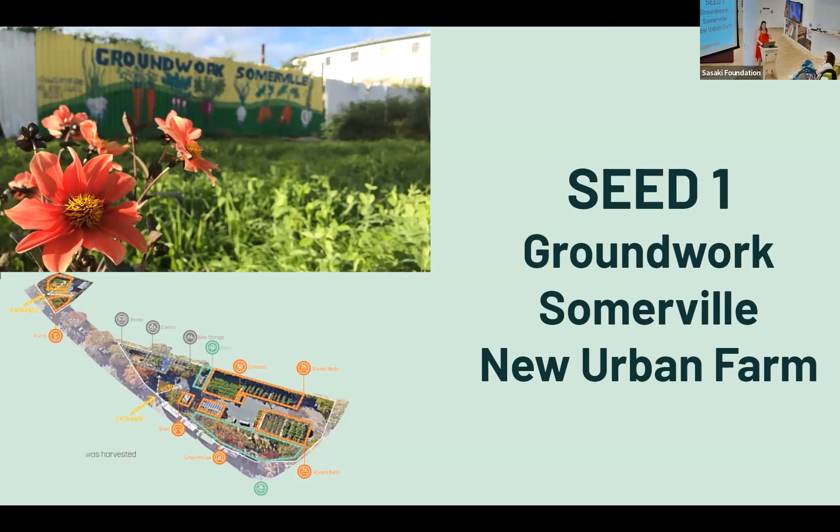So what did these incredible high school students work on this summer? They were able to work on 2 different projects. One is the Groundwork Somerville New Urban Farm. Groundwork Somerville is a nonprofit that works with young people in Somerville to do urban agriculture work, food security work, and a whole bunch of other really important things. And the 6 teams today, you will see presentations about their potential redesigns for their farm as they're going to be moving in the next handful of years.

Our SEED 2 students got to work on the 10 World Trade Youth Design Competition. So much fun. They presented on Wednesday. We're just so ecstatic about all of the work that they did. Congratulations, you were fantastic. And you're going to get to see their phenomenal presentations in just a minute.

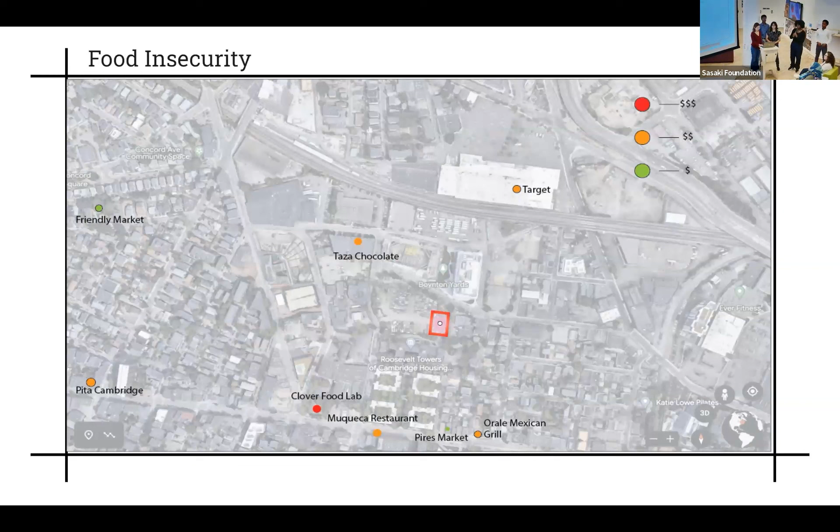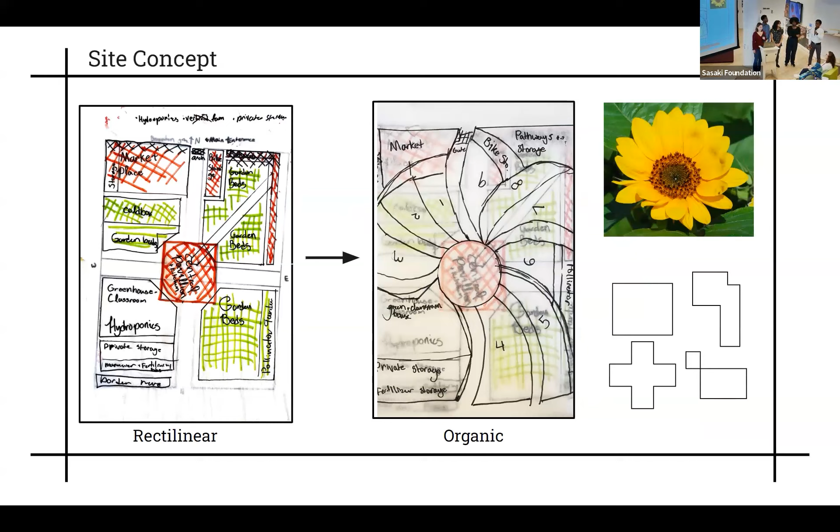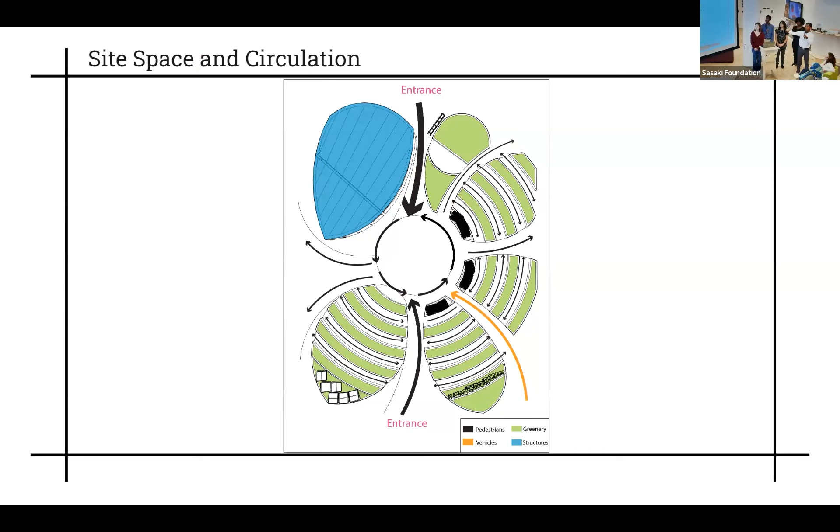This is a diagram of pedestrian and vehicle circulation on the site. At the top, we made the paths wider at the entrances and also in the center pavilion and the outdoor kitchen over there. And then over here is a photo that shows where all of our components are going to be laid out. As soon as you enter, you're going to be going through a trellis, which will be like a welcome and inviting space for you to walk through. This will lead to a central community space where you have on the left your greenhouse and then also the kitchen. And then all around the whole entire site are garden beds to grow produce and crops.

The trellis allows for an inviting entrance to the site. It also gives a visual experience to the community. It also gives access to the garden beds.

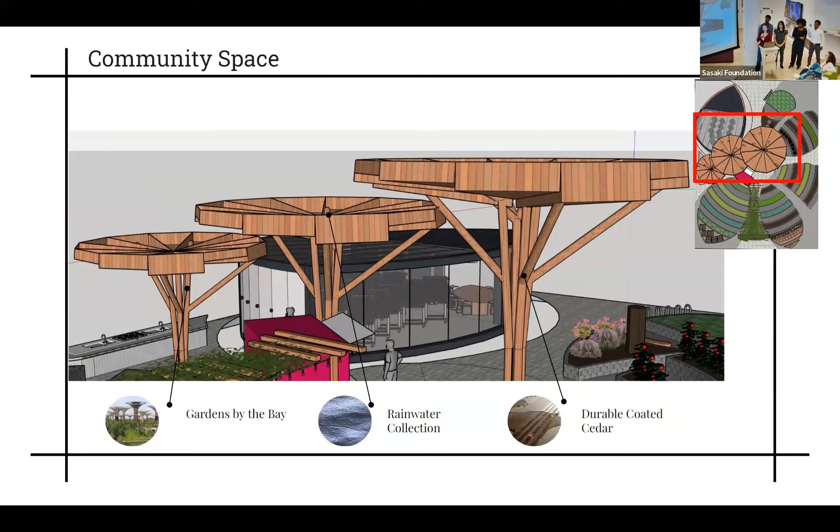So this is the community space that the trellis leads to, and these are the canopies, and they're inspired by Gardens by the Bay in Singapore, and they also resemble trees a lot. So these canopies are perfect for shade during sunny days and also shelter during rainy days, and they're ideal for rainwater collection. And the material we chose is durable coated cedar.

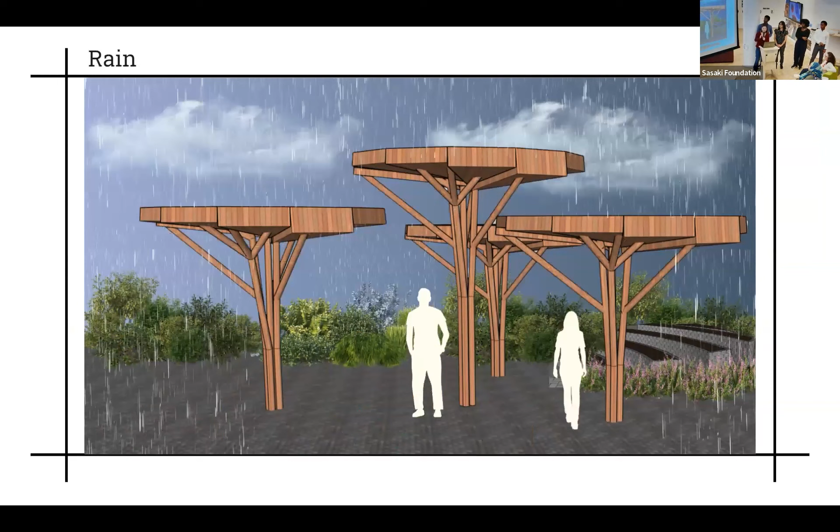And this is a 3D rendered version of our flex space, and it houses our mobile market, which can be removed depending on the context in which the space is used. And so given this flexibility, during the daytime, this can be used for the marketplace. During the evening, this can also be used for events because the canopies can hold lights to illuminate the space. And then also during rainy days, this obviously provides shelter.

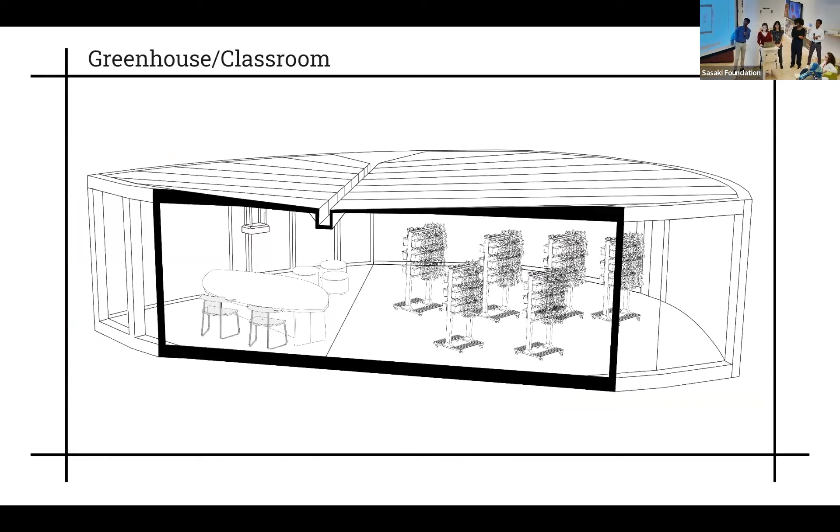And then over here is another detailed section view. It's important to note that on the roof of the classroom section, there are actually solar panels, and these will be used to power our solar-powered projector. And then over here, on our greenhouse, we made our roofs angled so that the water will go to a central point. This central point will lead to a pipe, and this will lead to the water collection system.

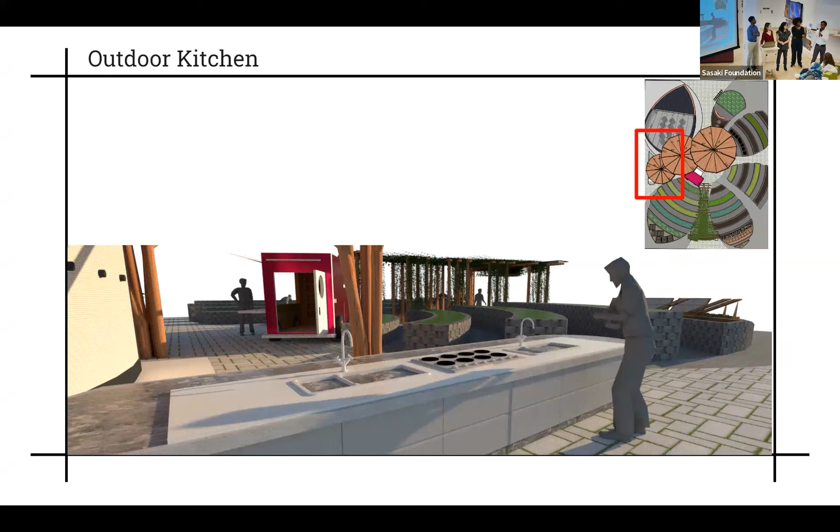The outdoor kitchen is strategically placed so it would be close and give direct access to the greenhouse, the center pavilion, and also the garden beds. For example, the kitchen allows for the community to be taught how to cook the food that's grown at the site. We also created a mobile kitchen that will be used to generally serve the community, especially the homeless.

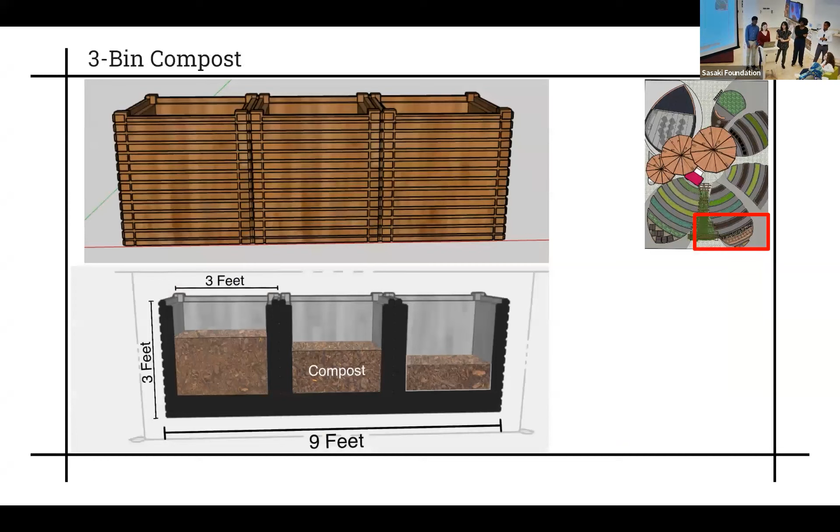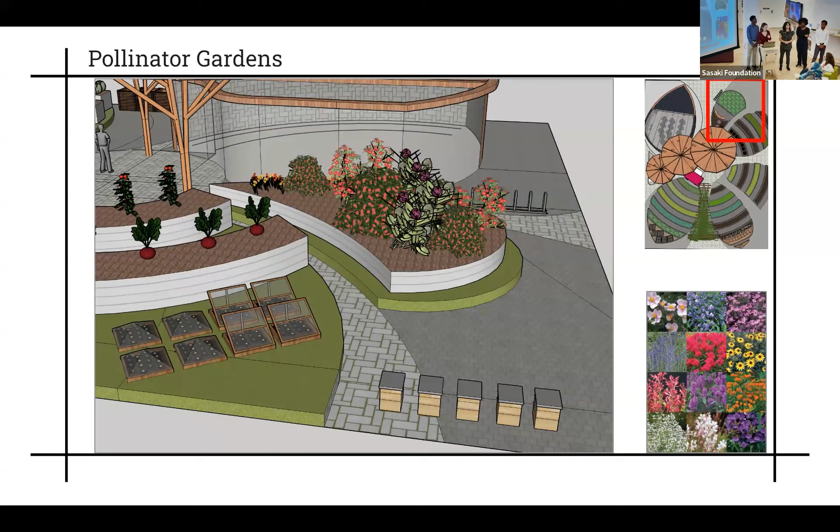So these are the pollinator gardens, and they're located at the main entrance of our site and close to the beehives, as you can see. So the pollinator garden will hold bug hotels and also native flora, so it can promote the local ecosystem. These are the insect hotels and beehives that we created that will also be located in the pollinator garden, and they are made from cedar wood so the community can paint on them.

Any questions? Oh, there is one. I think less a question and more a comment, but wow, you practiced this. This is a phenomenal amount of work, really stellar presentation. I hope you're proud of what you did. This is fantastic. And to go first, that's super hard and you just nailed it. So great ideas, really awesome visuals, and just phenomenal presentation. Great job. Thank you.

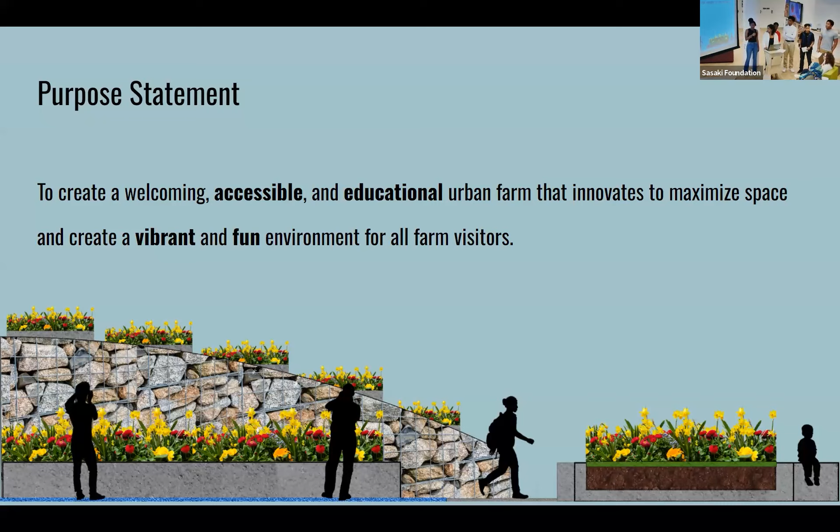With our site, we looked at it through the lens of social justice. Our site is in a previously redlined area. Redlining is the practice used by the FHA, which would highlight minority communities as poor financial risk, preventing them from getting access to food, schooling, and healthcare.

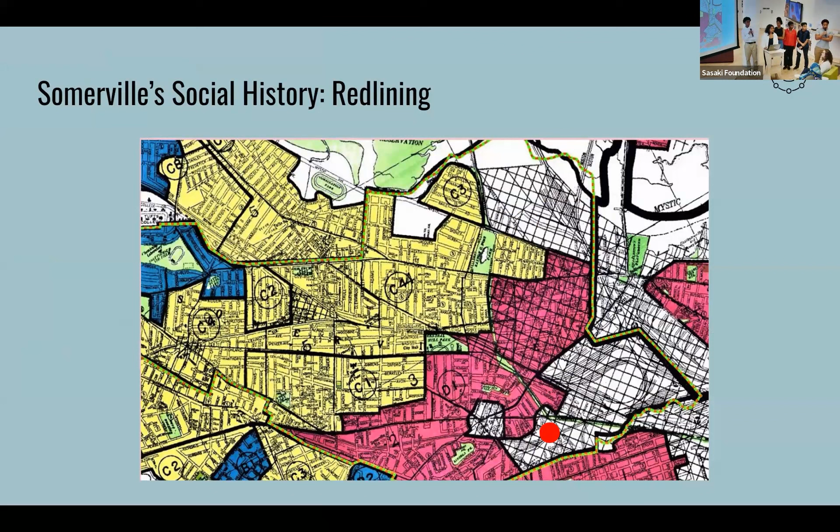Because of redlining, the Groundwork Somerville area has mostly been on the redlined side, and it's a lot hotter. This is because there's been less tree coverage and more impervious surfaces, which inevitably causes the area to be much warmer compared to white neighborhoods.

Our initial plan was to focus on movement, highlighting that we wanted to connect Boynton Yards development with the residents of the area.

We then looked at the sun pathing facing south, as well as the wind path coming from the northwest. We placed our garden beds away from shade and facing the sun, and used a greenhouse to block the wind path that could affect our crop growth.

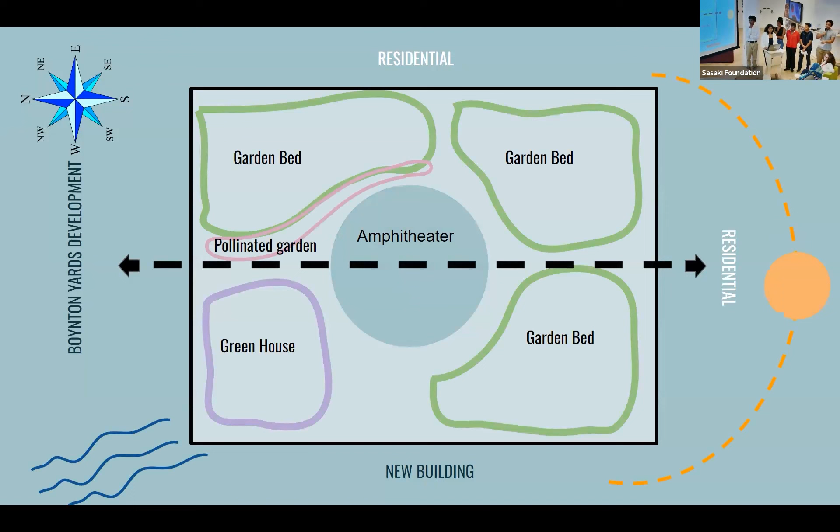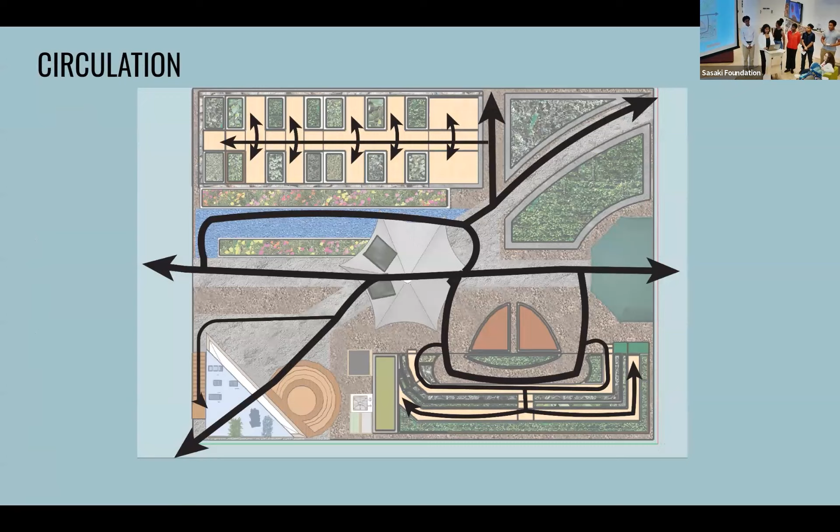This circulation map shows how we prioritized multiple entrances and exits to make our space more dynamic. And here are our components.

Not only is it a sustainable design, it's also educational, because we can educate the youth on urban heat island effects and cooling sites.

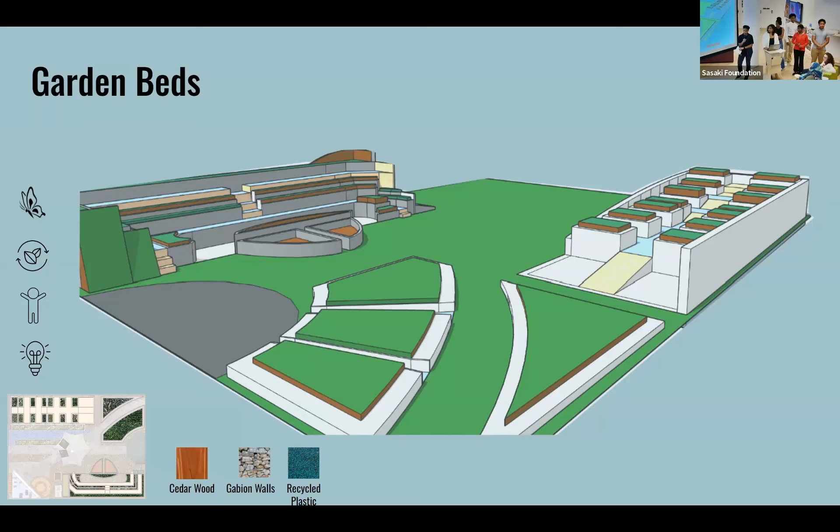So here's a construction diagram of our regular garden beds, in front of one of our entrances. Right when you enter the site, you see these garden beds made out of sidewalk curbside, which are on the current Groundwork Somerville site. It's something really creative that they did. Instead of letting those go to waste, they use that for garden beds. We want to honor that creativity and commitment to sustainability that Groundworks has by keeping it in the future site. You can see the makeup of the soil, that's not too important. And they're 1 foot tall, so accessible to our smaller users.

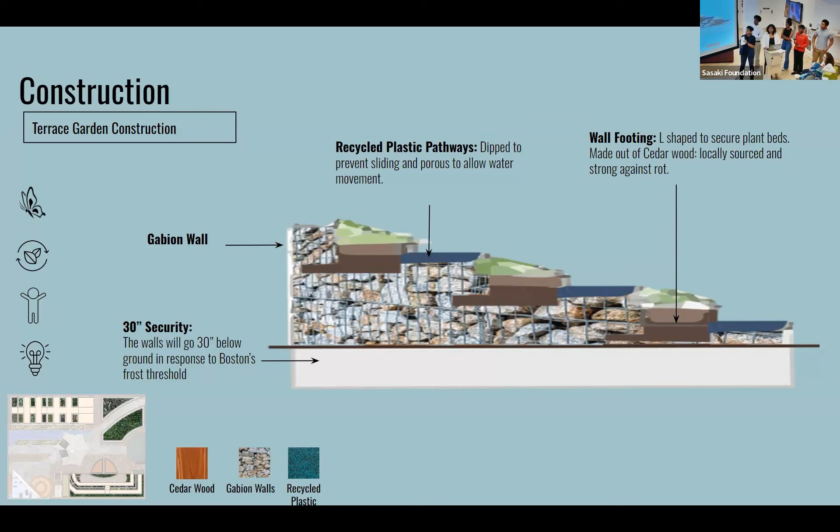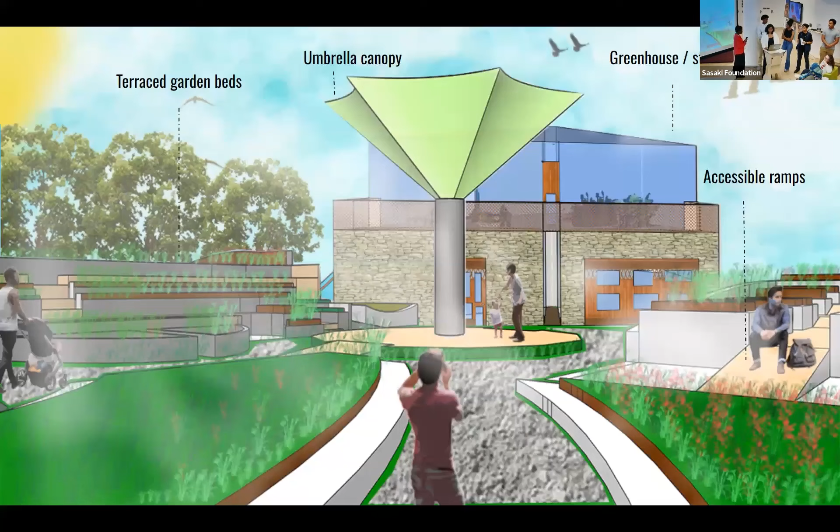With all that work, planning, and design, here is the final perspective of what our site will look like. You can see it's meant to be welcoming, accessible, and educational for all the users. So, yeah, thank you.

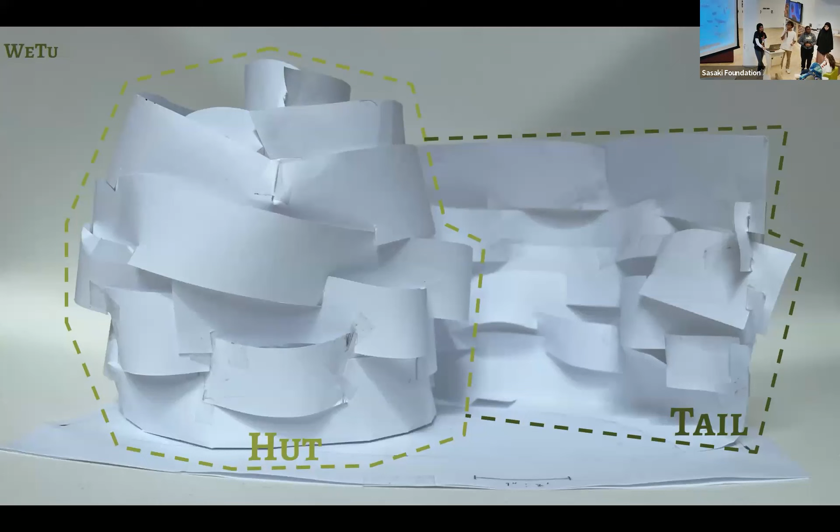To start, we made a paper model. Our design is split into two sections, the hut and the tail. The tail serves as an entry point as well as a display wall, with art hung on both sides, leading into the hut, which holds more focal pieces of art and accommodates 3D pieces like sculptures.

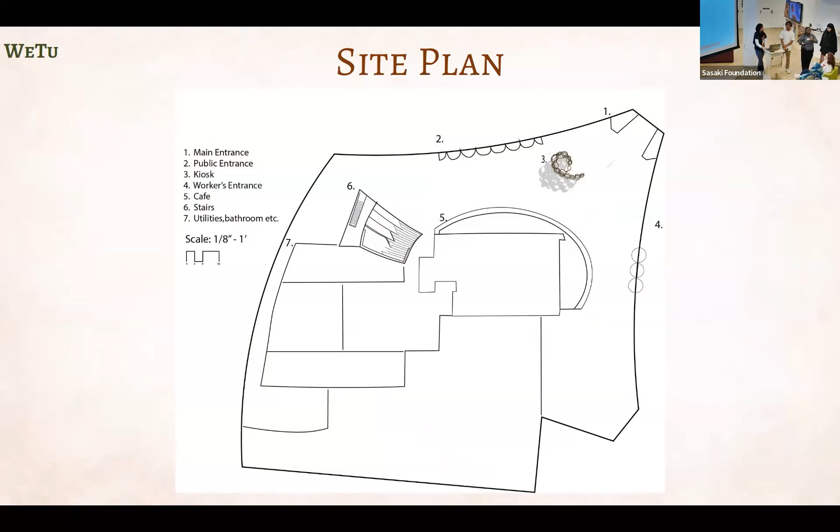For the floor plan, we thought that because of the curves of the kiosk, it gives you a sense of safety due to the enclosed walls.

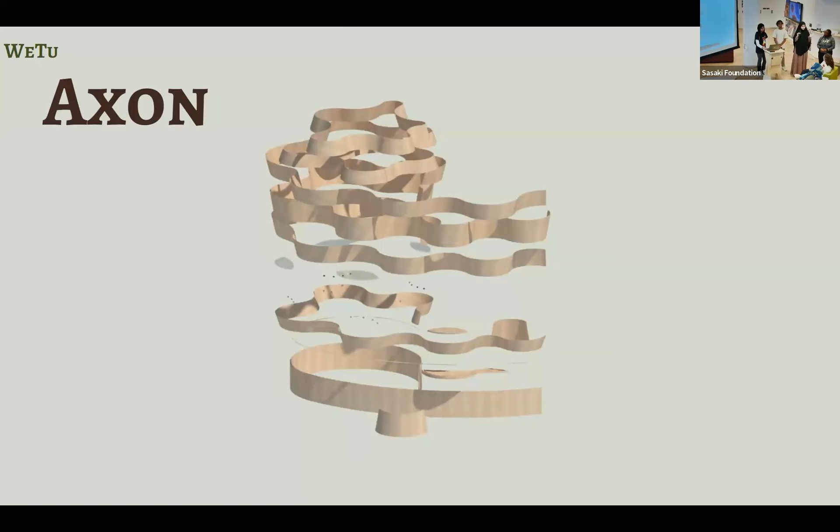Our design is made out of different size plank woods, ranging from the smallest being 8 inches wide to the largest being 2 feet wide. It shows how the curves are different sizes, creating a different aesthetic and unique design.

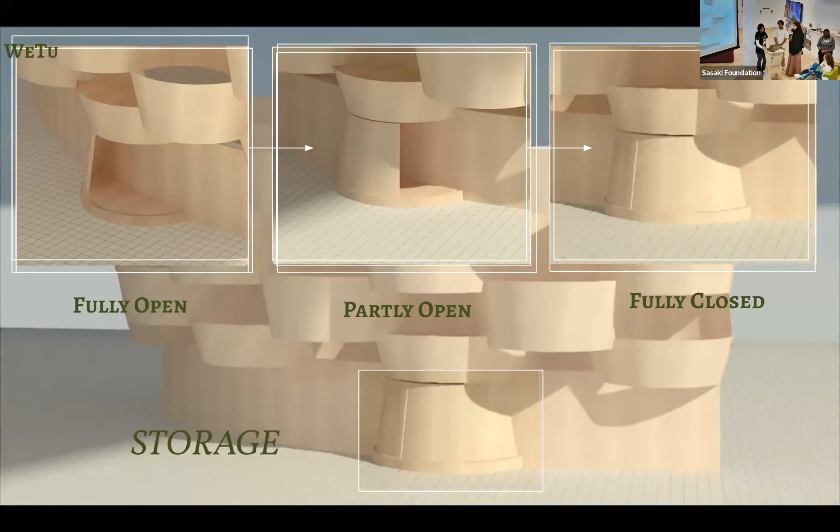For our 3D art pieces, we used the pockets of the weaving design to hold 3D art, using a glass or opaque bottom depending on the artist's preference, with lights from above and below to light up the artwork and create a spotlight. Also, our design is ADA accessible, with a doorway wider than 5 feet so anyone can go in, turn around, and come back out.

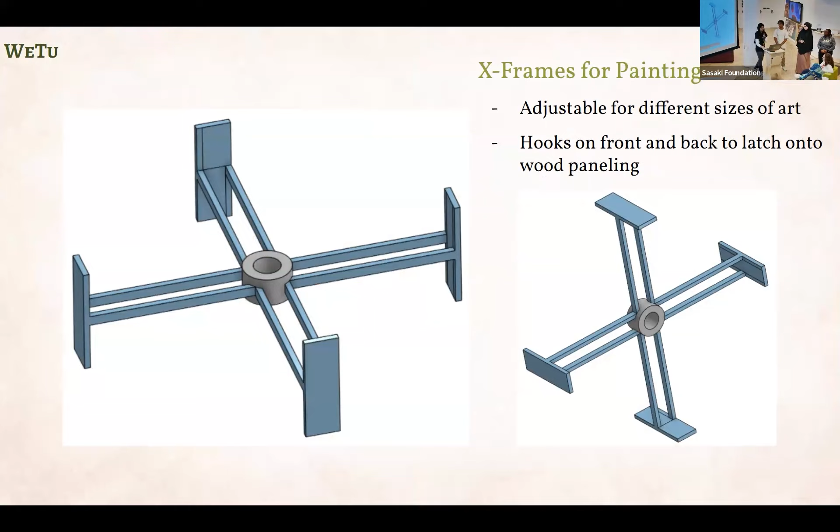Now, talking a little bit more on the materials, we wanted it to have the same feeling as inside the 10 World Trade building. So we thought of using wood, and we thought of using maple wood because it has a very nice look to it, it's not too flashy, and it has really good physical properties because it's strong and long lasting. And we were going to use this technique called steam bending to make these cool curves.

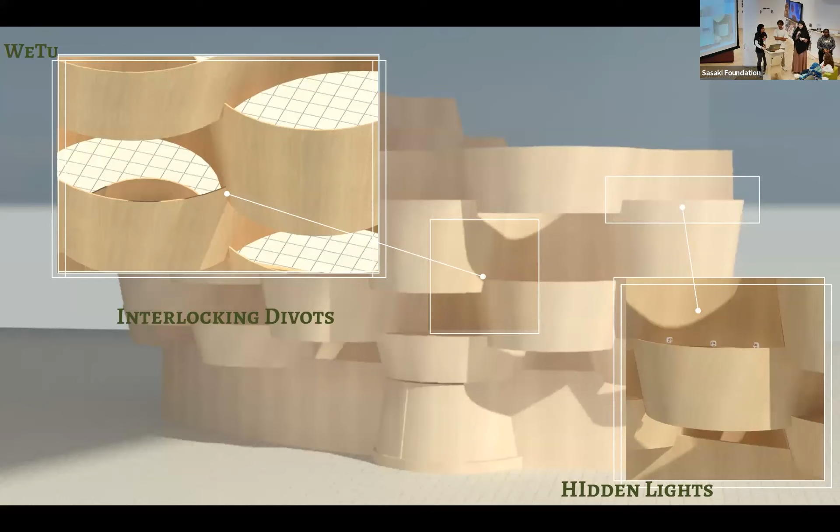Also, to put the planks of wood together, we have divots on the top and bottom of the different planks for them to interlock and stay in place. Also, our design is self-standing due to lateral stability and the shape of the design. Since it's curved, it would automatically stand without needing anything else to hold it up.

So the big question, why WeTu? WeTu is the embodiment of the diversity that we wanted to uplift in the Seaport community. WeTu weaves together different cultures and communities to create a space for visual storytelling that we hope will propel 10 World Trade to become a global hub for culture and creativity. Thank you.

Also, we'd like to thank Emily, our TA, for dealing with us for six weeks. A round of applause for her. This is working. Also our mentors, because without our mentors, we would not have gotten to this place. Especially, who do you think helped us the most? I'm not saying that. So any questions?

Congratulations, Sassafras. You guys did so lovely. I'm so proud of all of you. Oh, there's another question. All right. Thank you. Amazing. Fantastic job, you guys. And so I'll hand out your certificates. Safiwa. I also got your Dunkin' gift card. You're so welcome. Arham. Well done. Mariam. Fantastic job. Thank you.

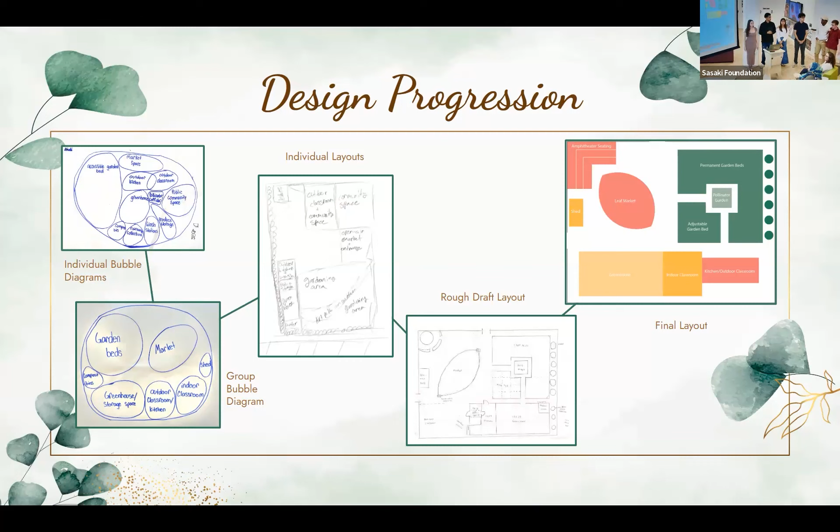And so in here, obviously, there's going to be some market stands so people can sell the food. There's going to be cash registers so they can buy the food. And there's going to be a banquet table so people can sit down, eat the produce if they want to, or just sit down if they need to. And then there's going to be fairy lights, so during the night, if people are still using the space, there's going to be light.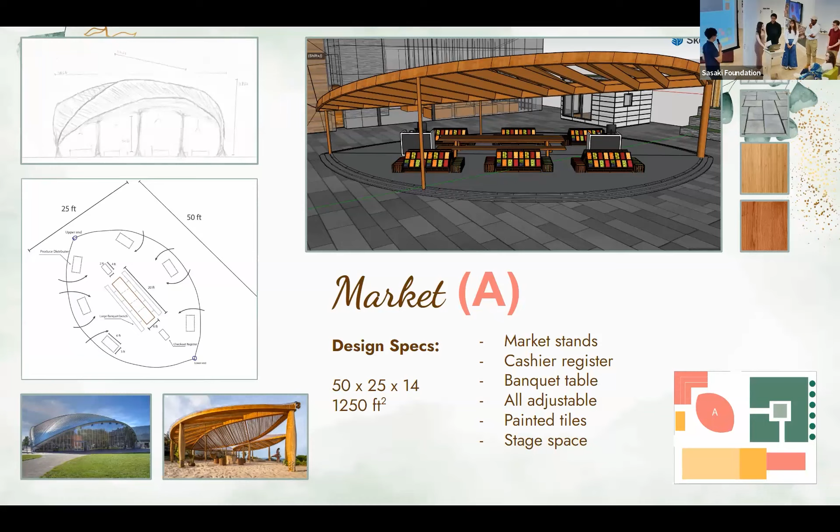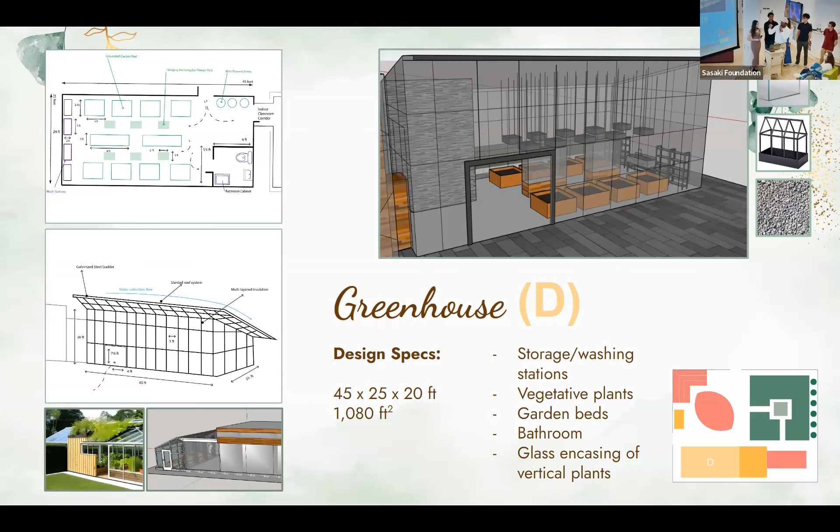We also have washing stations on the left-hand side of the greenhouse. And we also have a bathroom encased in the corner there that will act as the main bathroom for the entirety of the farm. We also have entrances, and then we have the connection to the indoor classroom that we'll now talk about.

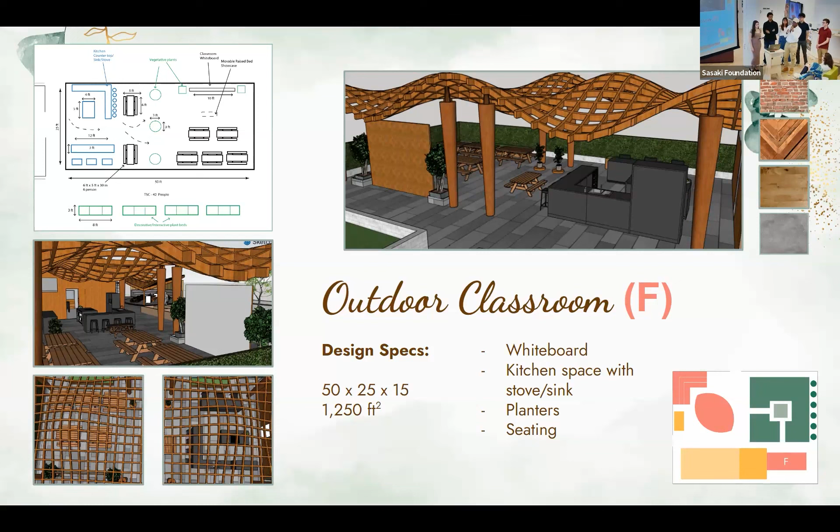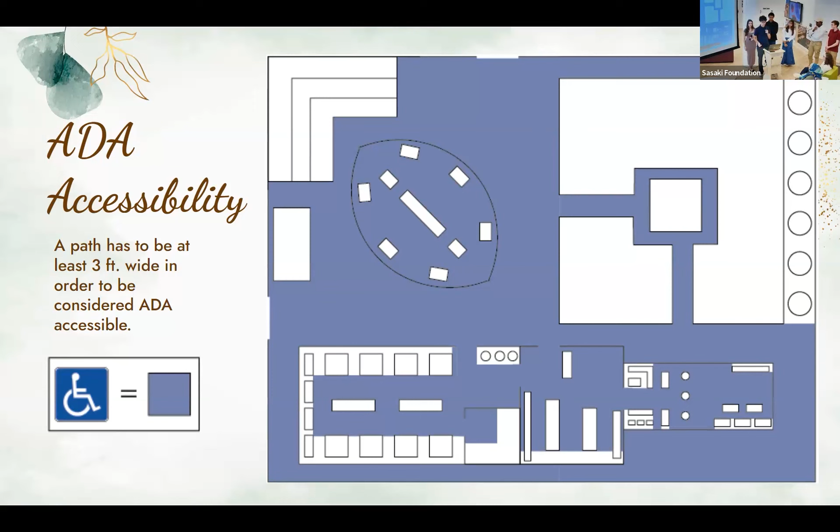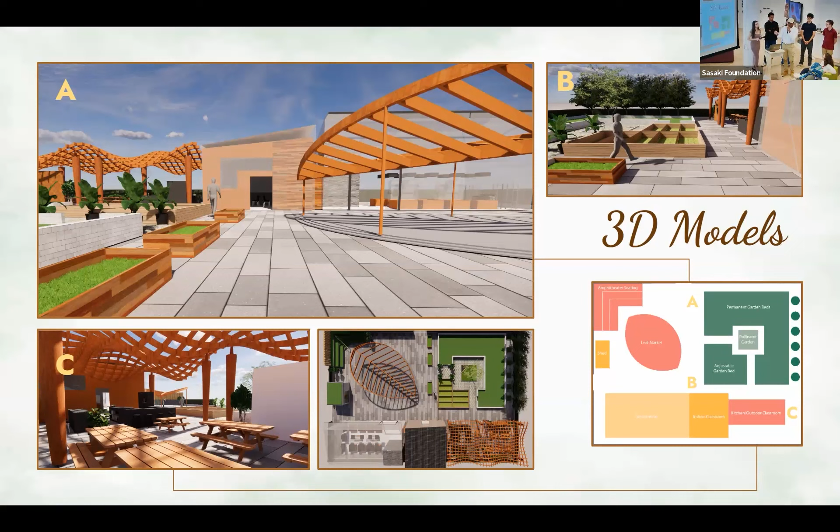Thank you very much. And a special thanks to our mentors, Sophie, Gideone, Chris, Nick, and Yasmin. We also accept questions. No questions? Or concerns?

So Groundwork Somerville has classes from around Somerville come in and tour the space over time. So school classrooms, mostly of I think 5th graders to middle schoolers, somewhere in that area. So those spaces are big enough for about 1 class size. So with indoor and outdoor seating, 2 classes can be there. And then also another class can be taking a tour around the space.

So it functions for more kids than you'd think with just those 2 class spaces, each being about 1 class size. And also an added benefit of the outdoor classroom is that it allows us to have some kind of space indoor and outdoors, meaning that the classroom space will be accessible throughout the entirety of the year. That way the class can be taught whether it be in January, February, or in the summer times like we have now. The outdoor space is also specifically designed so there's vegetation all around, and it still incorporates that idea of a farm in its design.

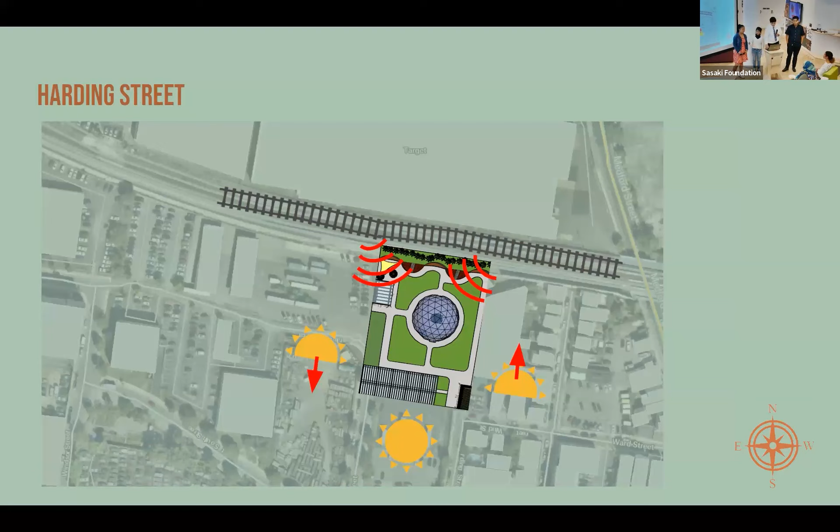These are the factors that affect our site, one of them being the train and the noise pollution it presents, and we'll get into that later. Zooming into our site, we wanted to focus on our 8 main components. The Zoom is covering one of them, but that's the greenhouse. And we wanted this layout to move from a more public and open area to more of a secluded and private area.

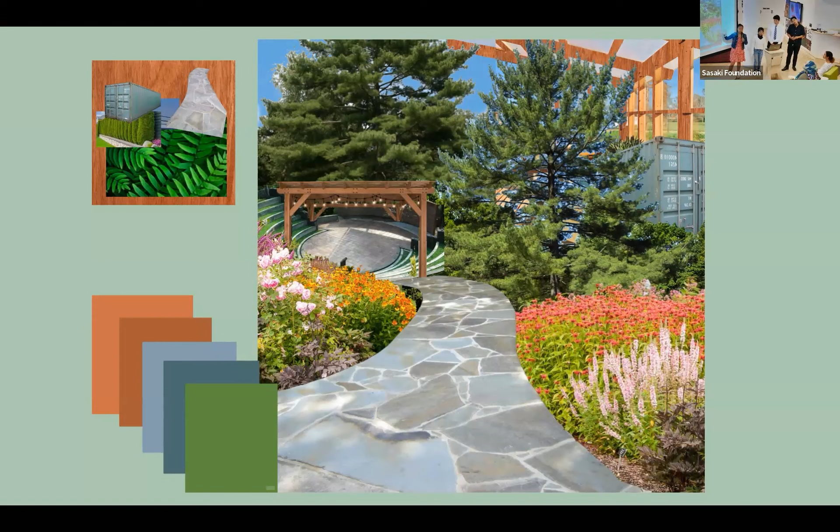So here's a look at the material collage that we have going on. We really wanted our site to say, we're open, we're warm, we're welcoming. So we decided to go with cedar wood for all of our wood-based components because it's warm, it's comforting, it's beautiful. We went with bluestone flagstone for our paths because it looks cool. And we made sure to have a lot of greenery throughout the entire garden to really make it feel cozy.

And as Violet said, we wanted there to be a public to private sort of feeling. So once you cross the threshold of the busy, bustling market, you can find peace and calm and just hang out with your friends or take a break in the more secluded tree line area. And we wanted it to flow naturally.

We went through multiple iterations throughout our design process. We started off with a really blocky bubble diagram, and we moved forward towards more organic shapes. And as you can see, we really stuck with our tree line placement and our marketplace placement. And we ended with a centralized greenhouse design.

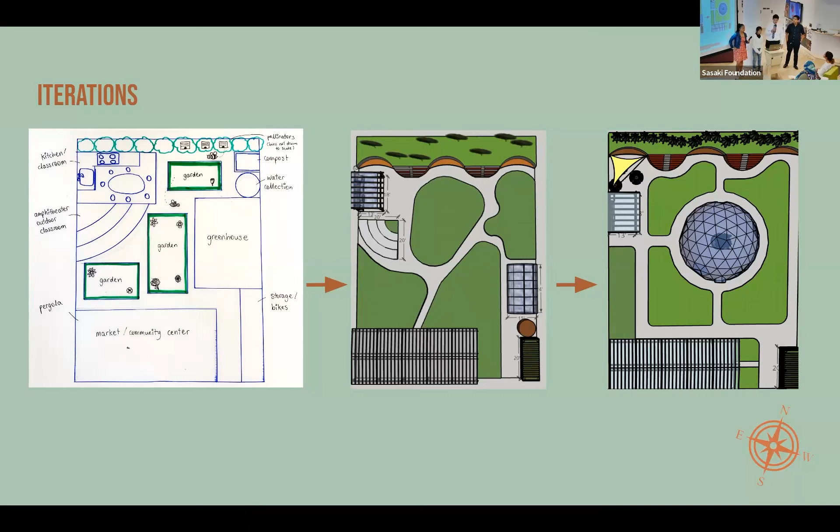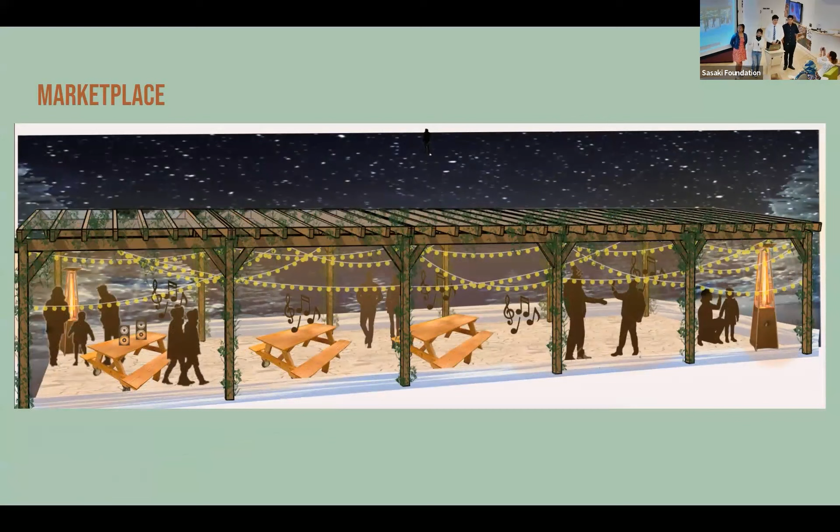So now we're going to go a little bit more into each component of our design. As the marketplace is the main entrance to our site, we wanted to focus on different events that can take place here, and diagrams of them. Some of these events include the actual market where Groundwork Somerville will sell their crops along with other dishes, an evening spot where you can unwind from the busy city life around you. And during the winter when crops can't grow as well, we wanted a really cozy environment to keep the place alive during these times.

Our marketplace is made out of pergolas, which are made out of cedar wood, both because of their cozy look and because of how weatherproof they are. Like I said before, our paths are all made of bluestone, including the ground for the marketplace. And polycarbonate also plays a big role in our design because it covers the tops of the pergolas to make them weatherproof. As well, we use it in our greenhouse, which you will see in a second, because it's inexpensive, it's durable, and can be found anywhere.

Our garden spaces were designed with organic curves. This encourages the visitors to flow through the rest of our key components. On the edges of the green spaces we will have flowers, and the middle will be occupied by our crops. Our pollinator gardens consist of flowers that are local to Massachusetts, which, because of their color, are way more attractive to our pollinators.

Due to Somerville's diverse demographics, these are some of the culturally relevant crops that we could grow and that would be occupying the middle of our garden beds. As most of our pathways are lined with our garden beds, we wanted you to be able to go on a leisurely walk on a sunny afternoon where you can stop and smell the flowers and really just unwind in this environment.

So now we're moving to the focal point of our design, which is the greenhouse. And as you can see, everything kind of just flows around it, which is what we were going for. This greenhouse has gone through at least 4 iterations, gut-wrenching iterations, and we finally settled on this biodome. You can't really see it here, but there's a render later on that's more realistic.

But all these bones are going to be made from cedar wood to echo the rest of the materials on our site. And we want this to be a space not only where greenery can flourish, but also where knowledge can flourish, so that kids and the community can learn about the crops that we're growing in here and how they can use them.

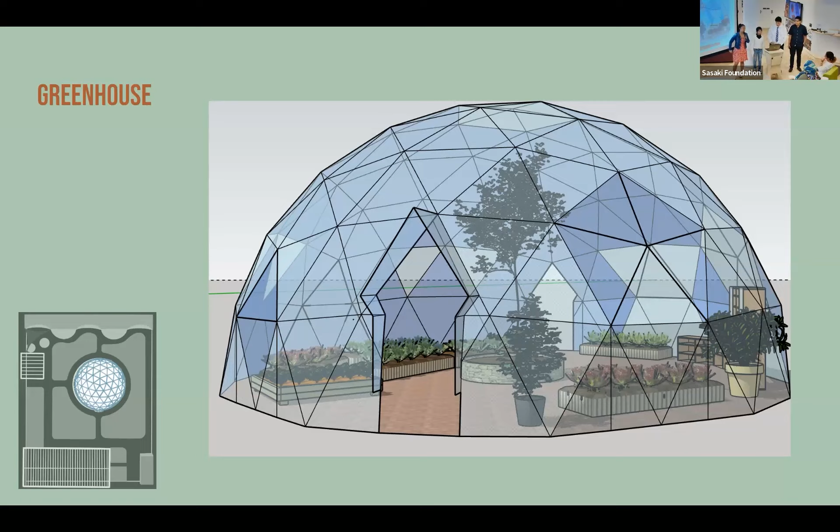The kitchen and seating area is in the more private part because it's used mostly for teaching. It's made out of bricks because bricks are cozy and weatherproof as well, along with the same cedarwood material for the pergolas. And we really wanted it to feel homey, like you could literally be in your house. We can see the kids learning how to cook. We can smell the aroma of whatever they're grilling there. So we just wanted it to be very homey feeling.

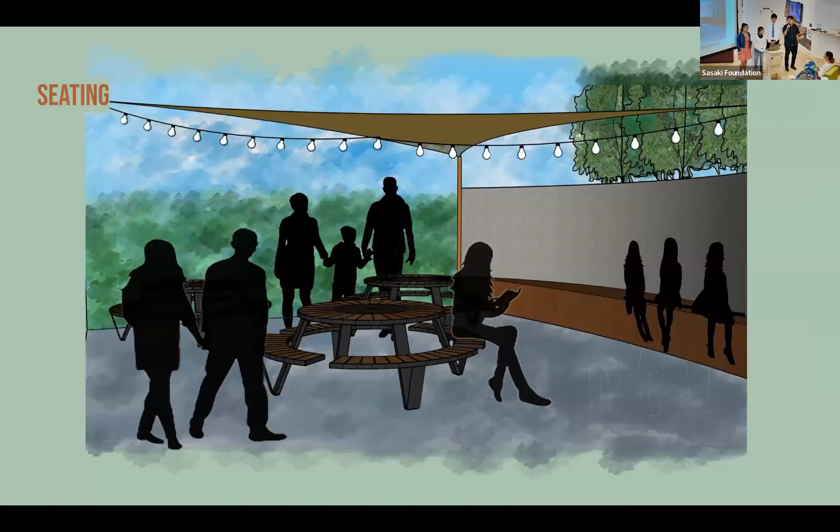The seating area is an extension to the kitchen. It also serves as an outdoor classroom space and another gathering area. This was strategically placed in a corner so that it feels cozy and encourages people to interact with one another.

Not only this, we have our composting on the opposite side to our main seating for a more enclosed environment, where the kids can come and learn more about that. And some people are not as inclined to smell the compost.

The tree line consists of a water collection system as well. The excess water from the trees and the space above, as it's quite wide in comparison to most of our site, collects in the bottom of this water system and then travels to our main water source.

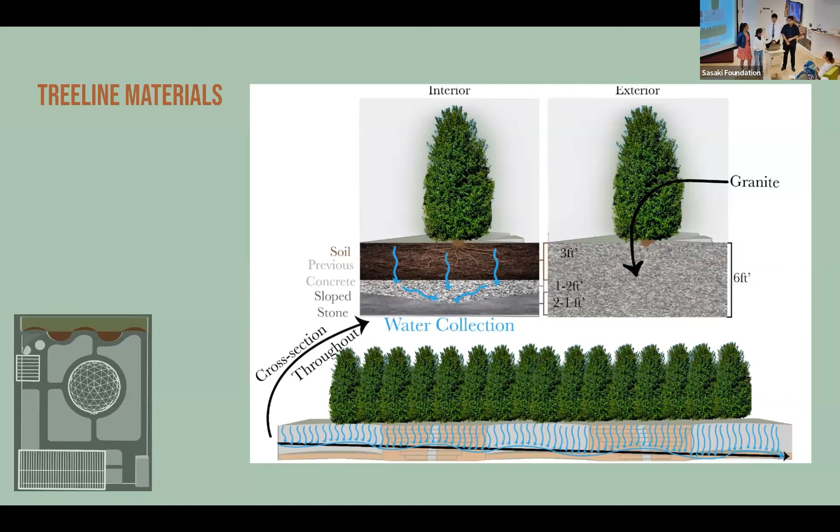In addition to collecting water from the tree line, we have these water collection systems placed beneath the greenhouse and the marketplace. What it does is capture stormwater, filter it and store it in a tank, which is later pumped out and used as a drip irrigation system to water our plants.

Looping back around the other side of our garden, we have our shipping container, which is taken from the current Groundwork Somerville site and is used for bike storage and tool storage, stuff like that. It's also an opportunity for local artists to paint murals and stuff.

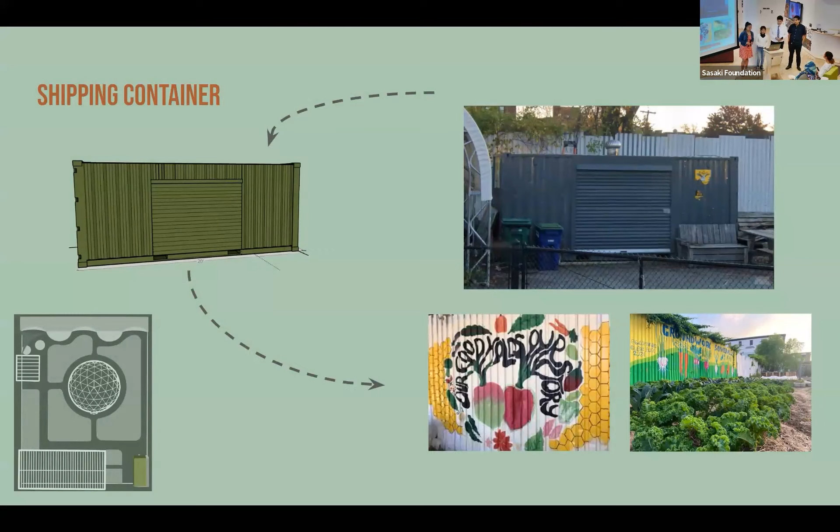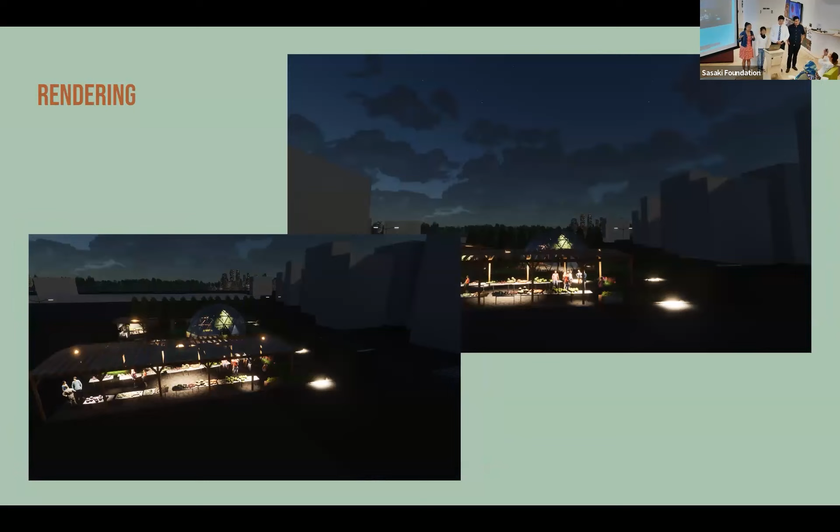Once our site is complete, this is what it will look like. I'll show you a more detailed rendering - this melted my computer, but this is in the context of Somerville. I literally took the buildings from the map and directly put them onto this rendering to see how the sun will affect the shade and how that would affect our urban farm and the crops. And here's what it would look like. At night it looks a little sketchy because I didn't put in the streetlights since my computer was already overheating, but this is what it would look like when it's in use.

Speaking of actually using the urban farm, we're going to go back to the values and our mission statement. So we're going to try to cultivate a rooted community where knowledge grows from seed to harvest. Thank you.

Do we have any questions, comments, concerns? No? That means we did good.

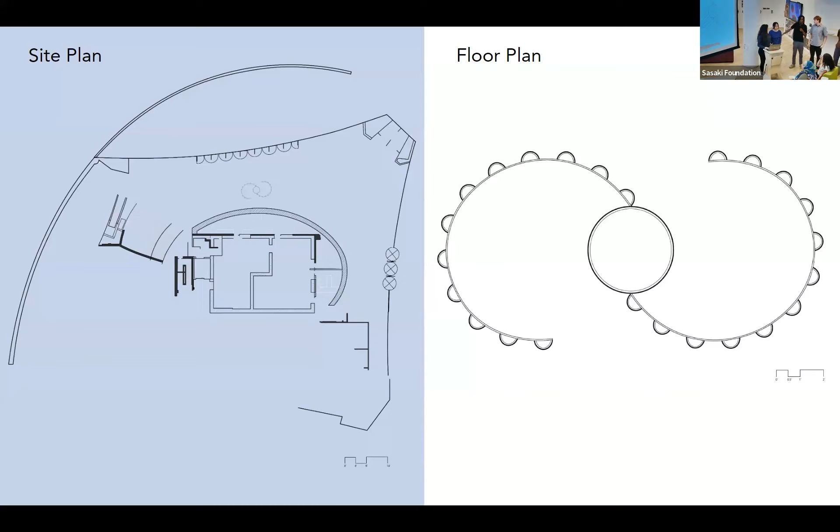Getting into our concepts, our inspiration, we really wanted to mirror the free flowing forms of the 10 World Trade and have our kiosk blend seamlessly into the lobby. We looked to the ocean for inspiration for the free flowing forms that would feel accessible as well as interesting to the people who are going to see them. We really decided on the idea of inclusive, adaptable, and for everyone as the mission statement for our kiosk.

This started with the idea of shadow, light, and translucency. We wanted to draw people in with the idea of translucency - like when you look at the ocean, you see light refracting through the water. You look into the water, you're inspired, you're interested, you want to go in and explore more. We really took that idea for our kiosk. We wanted it to be accessible to both the public and the artists very easily. For kids, we used colorful and interesting materials. For adults, we made it reconfigurable and ever changing.

And then at the end of the day, it's really for everyone because the artists can configure it and adjust it to display their art in the best way possible. And that comes through flexibility, flair, and a facilitation of connection and comfort.

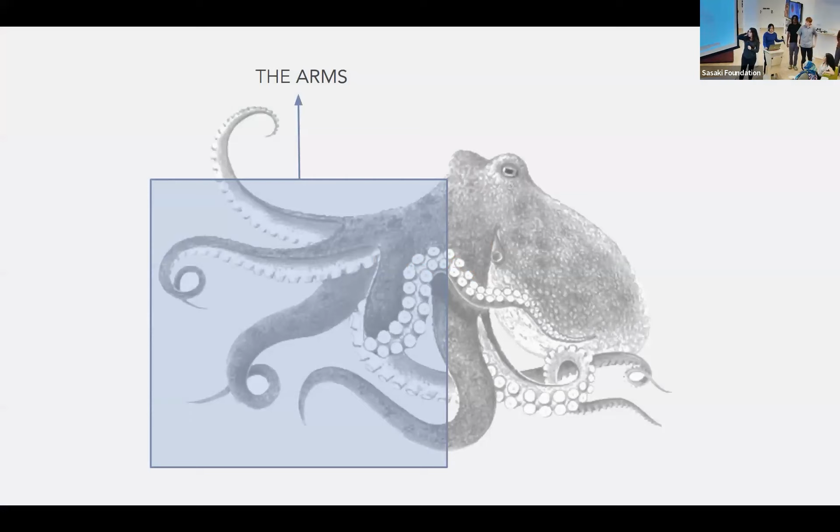We'll begin by talking about the arms. As Jay was noting, playfulness was a really important aspect for our design. As you can see at the model at the top, we tried to harness shadows and light by seeing the silhouettes through. Also going along with that playfulness, we have the maze-like gallery space that ends at the mantle, and staggering heights for each of the walls that mimic the coral and the playfulness through that.

We also made the design decision of using semicircle columns to suit both functionality and aesthetics, by being able to use that flat side for hanging shelving and art.

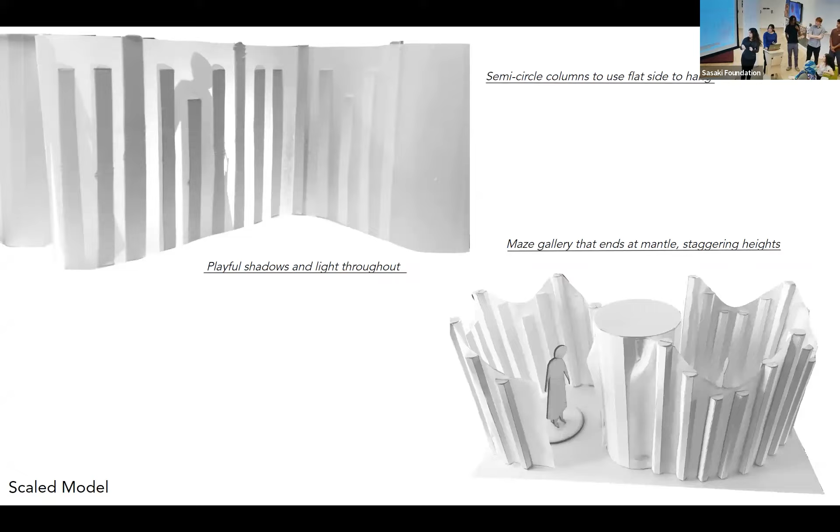If there's 3 artists, 2 artists, or 1, any of those are a possibility. Also, if the artist wants a more intimate and enclosed space, you can see at the top corner, that's a possibility. Also understanding that digital art is becoming more and more popular these days, we thought about that by having an opportunity to use projection in the space as well.

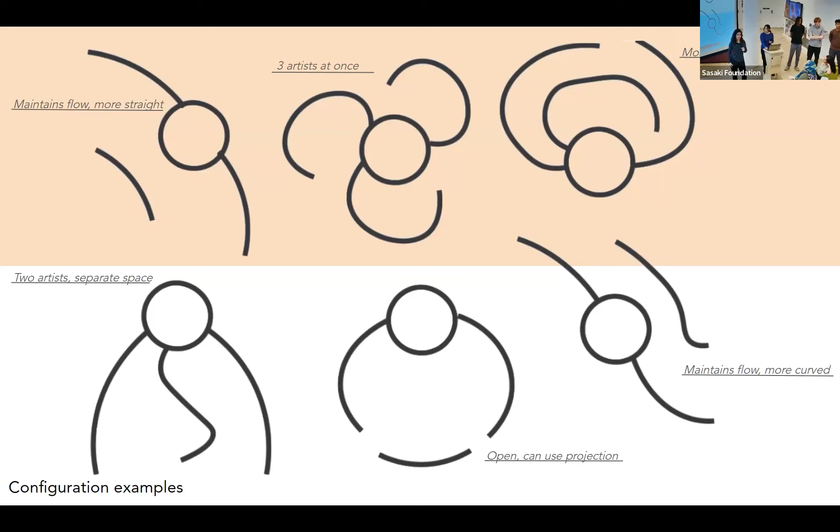Looking more directly into the arm components themselves, we first explored perforation with the laser cutter to have LED lights shine through. We wanted to go beyond just that, because perforation serves the aesthetics, but we wanted to go beyond that. So we decided to double that with a pegboard system that allowed us to hang art and shelves, fostering both aesthetics and functionality.

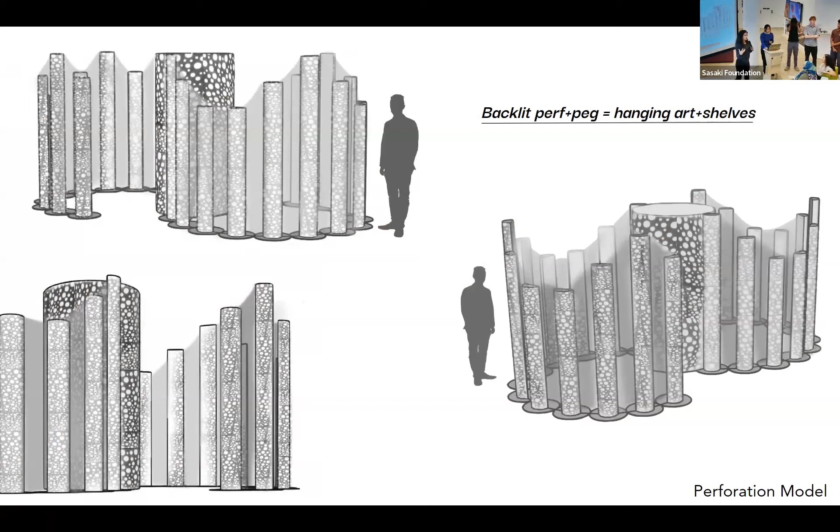We wanted that perforation pattern to mimic bubbles like the sea, to further emphasize our connection back to the ocean. This is what it looks like on the model itself, and you can see that, especially if it's backlit with those LED lights, it really can have that sense of being in the ocean and the feeling we want to invoke.

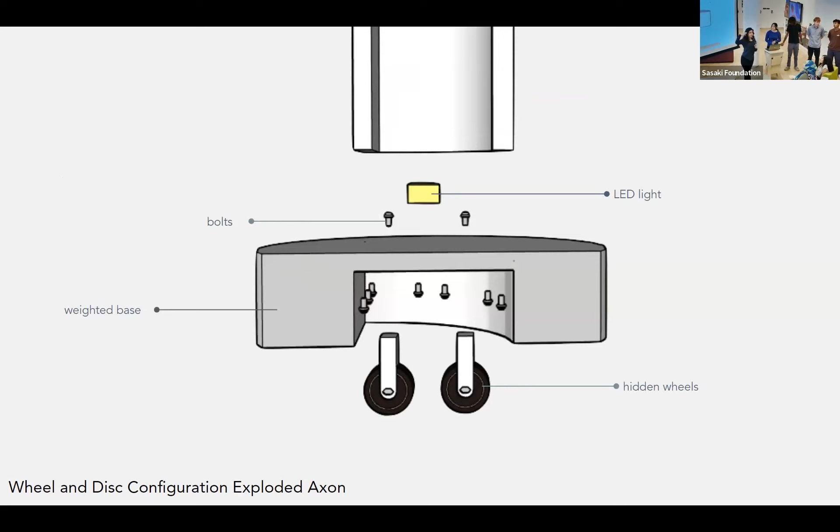So the next section of our proposal is the mantle. But before I go into more details, I wanted to briefly explain the inspiration behind the design. If you didn't already know, the big sack behind the octopus's head is actually referred to as the mantle, and that's where the creature stores most of its vital organs, such as the brain, heart, and stomach. Similarly, our own mantle design functions the same way, and it dual-serves as a storage and display structure.

We wanted to still play with the perforation system that Parmis mentioned earlier. So we have a pegboard facade that's backlit, and the pegboard would make it easy for the artist to use to hang up shelving and display their 3D pieces.

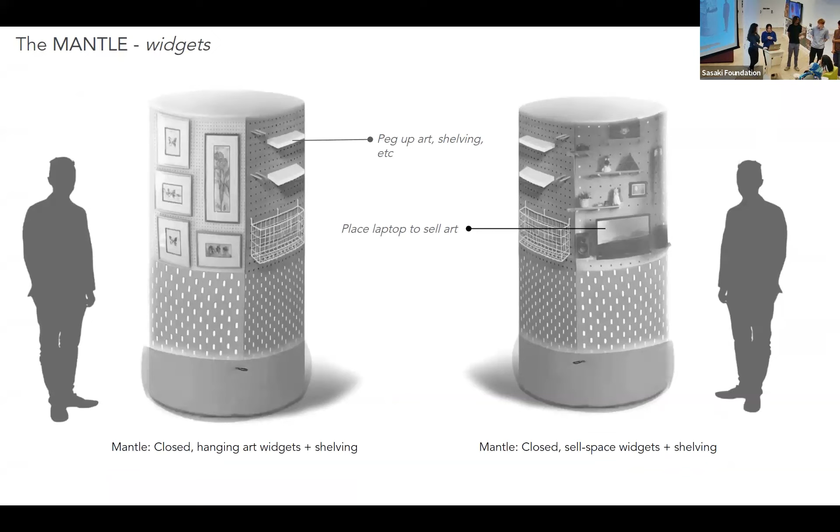This is an example of the mantle with widgets on, because we wanted to make it really customizable and flexible for the artists to change things according to their own taste and discretion. They can create an exhibition space if they wish, if they want to sell art. And this is an exploded axon of the mantle, and it shows how all the pieces just fit together.

So really quickly, I'm going to be talking to you guys about the materials. We want it to be simple, so we had an acrylic semicircle for the tubes, fabric, maybe lycra, and a weighted base, kind of like metal or a light metal.

And on the fabric, we wanted to have a sail-like mechanism with one end having it thick to slide into the column, and on the bottom, we would have a hook to connect it for being more stable.

So why do we believe the chromopod is the right choice? As you can see, there are a lot of words to describe the chromopod, some being adaptable, inclusive, and dynamic. But the most important part of our design is that it is for everyone. So let's take the plunge and invite the chromopod to its new home at 10 World Trade. Thank you.

Any questions? Any questions? Any questions?

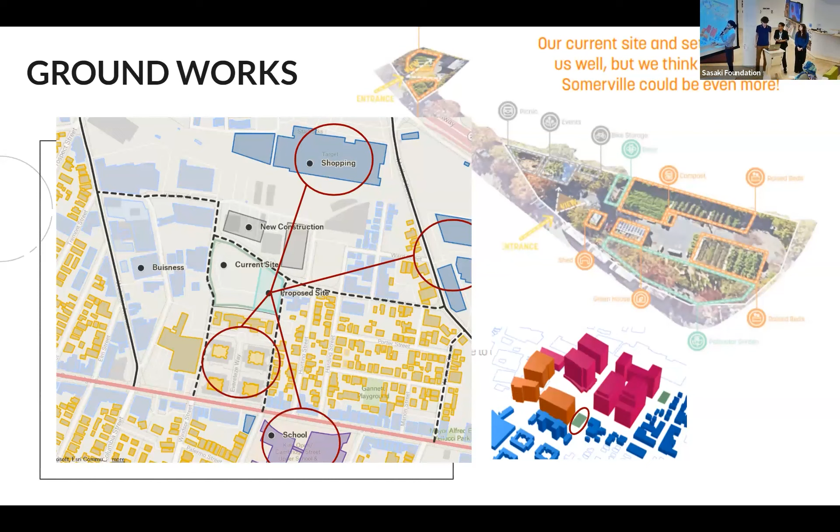So we're going to get into some context right now. As you can see here, we have the current site and then we have a new proposed site. With this new proposed site, we wanted to point out roads, which are access points that people could possibly tune into. We also want to point out some residential areas, school, offices, shopping, just anywhere where people could tap into the proposed site. Here we have another view of the proposed site, and here we just have a bunch of development going on here, as we see a big orange building that will eventually be built.

Okay, so here's our team manifesto. As you know, my team, we actually believe design should help improve the daily lives of others, be inclusive to all walks of life, and reflect the spirit of the people or the history. Also, our farm aims to accomplish this by creating a space that can serve the community, educate, and provide food for the people.

So starting with our materials, the materials that we will be using for the kitchen, the bridge, and part of our greenhouse will be beechwood. For our raised garden beds and walls, we'll be using concrete curb cuts. And then for our bike rack and roofing of the kitchen and the rack, we'll be using corrugated metal.

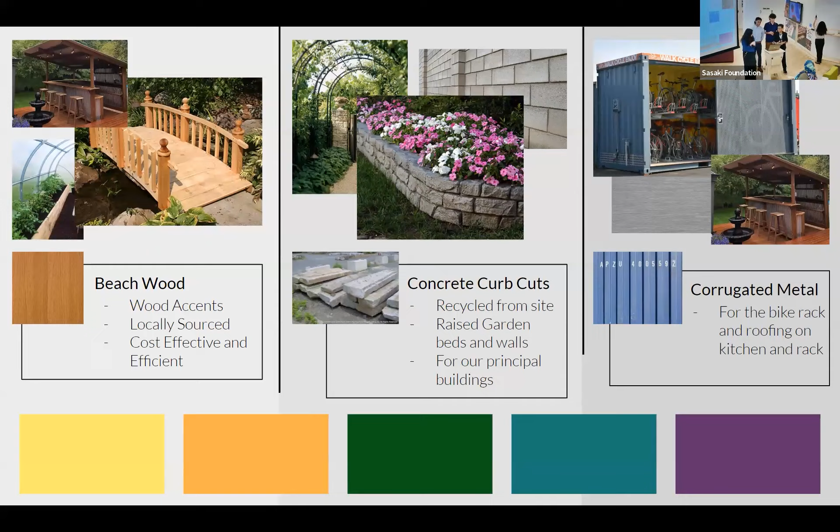At the bottom, you can see our color palette, which is implemented in the accents of the materials that we are using. And also this color palette we are planning to use in murals and around the site. This color palette is warm and welcoming, and we want to create that atmosphere in our site. Okay, up here we have a precedent for our cascading terrace gardens, which you can see there.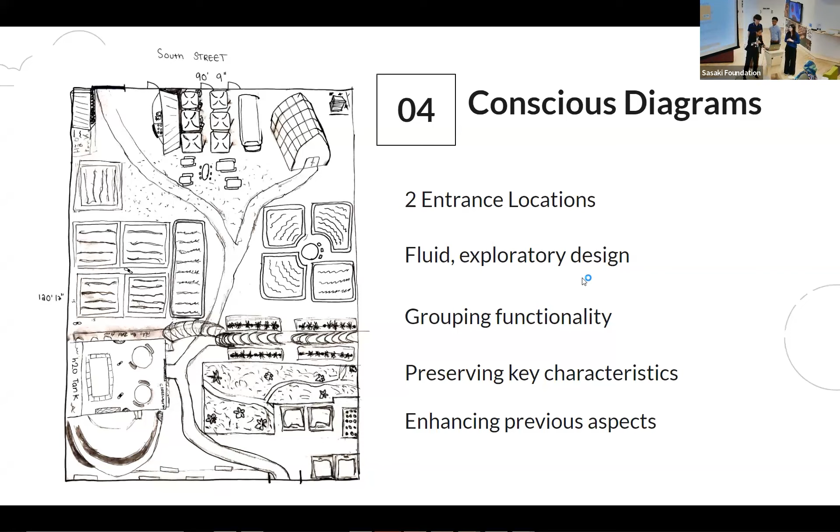Okay, so I want to point out a few things that are important to our site. The garden beds are specifically placed in the middle for circulation throughout the site. There is an entry point on the top near South Street, and there's another entry point which is being covered too over here by the Roosevelt Towers. So the point of the garden beds being there would be accessibility for both entry points.

Another point I want to point out is if you look down here is the classroom/amphitheater. Around this area, there will be a school, and we added that classroom/amphitheater in that corner specifically because we wanted to invite students from that school to come into our site.

On the top, also the marketplace and community is on the edge of South Street because South Street is a pretty busy street, and there is also a bike lane, and we wanted people who are walking by or biking to be invited to come in to our site.

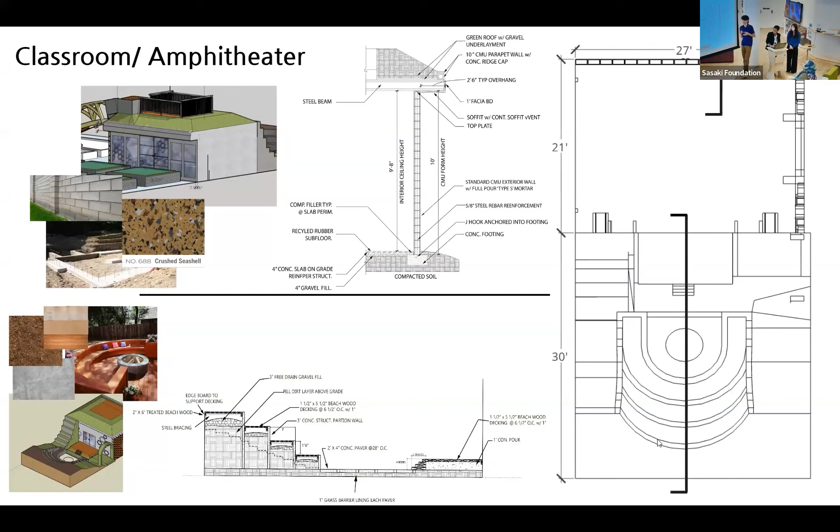Here is a diagram I made of a green roof, as you can see by those two diagrams. So the idea we wanted to keep in mind is that rainwater would essentially come through this decking layer right here into these pipes that will be deposited into a cinder block, which then would be connected to some sort of barrel, which will have water in it that we'll use for irrigation. And another thing we want to keep in mind is these materials right here we want to use for our green roof. Yeah.

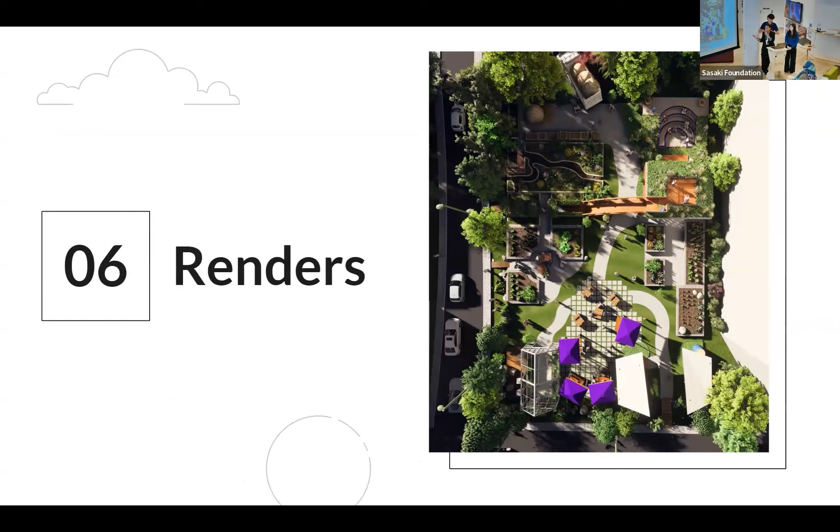Here are some renders. Well, this is the bird's eye view of our renders. We had a really fun time with it, putting our 3D model into a very nice vision. Here is just a 3D model of our close-up in actual Somerville. Here's it in action, as you can see. Yeah, with the people walking through the garden beds or at the marketplace.

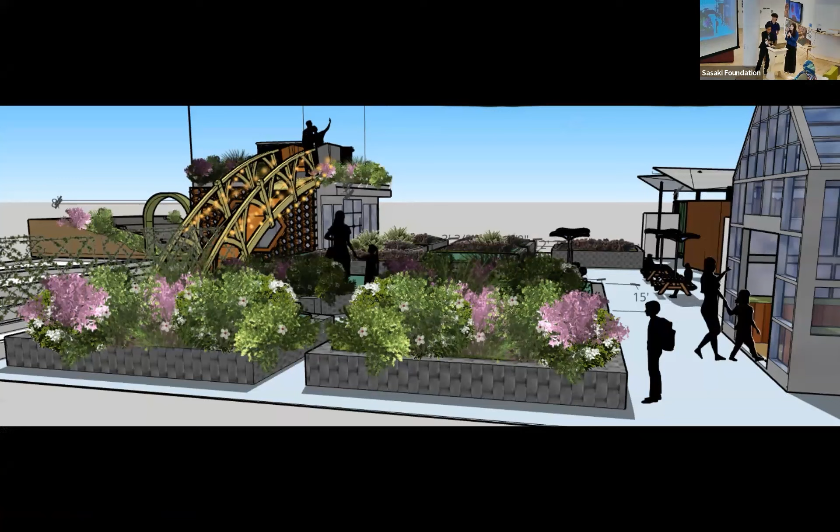Here's another render I made on Photoshop also. So with this one, I wanted to show the community with the connection of the bridge, which has fairy lights, and also the garden beds. On the top part, you can see inside the greenhouse, we have the plants elevated so that people in wheelchairs can access it and plant as well.

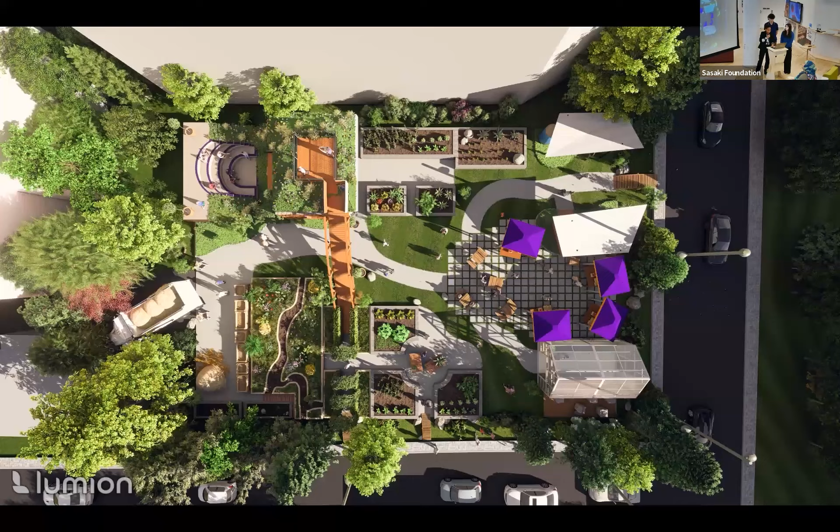And the bottom is our kitchen that's also going to be used to either prepare foods from the farmers markets or the mobile stores and have people be able to use that. And here's a bird's eye view of it in action. And we hope that our model can not only educate, provide food, but also serve the community all in all.

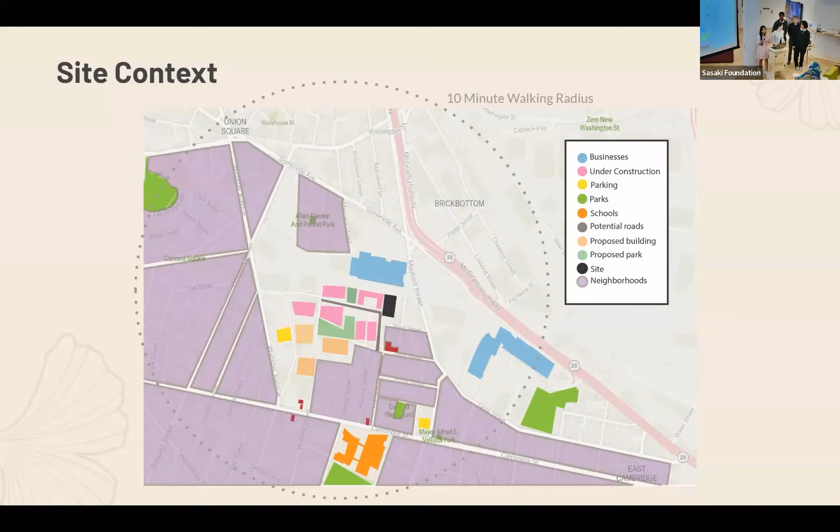To add on, these are all the buildings that are around our site. So the dashed circle represents a 10-minute walking radius. As you can see by the purple, there's a lot of residential areas, and there's also other parks and businesses. Somerville also has a large food insecurity. Around the site, there's only about 3 food resources. However, these resources are not always affordable for everybody.

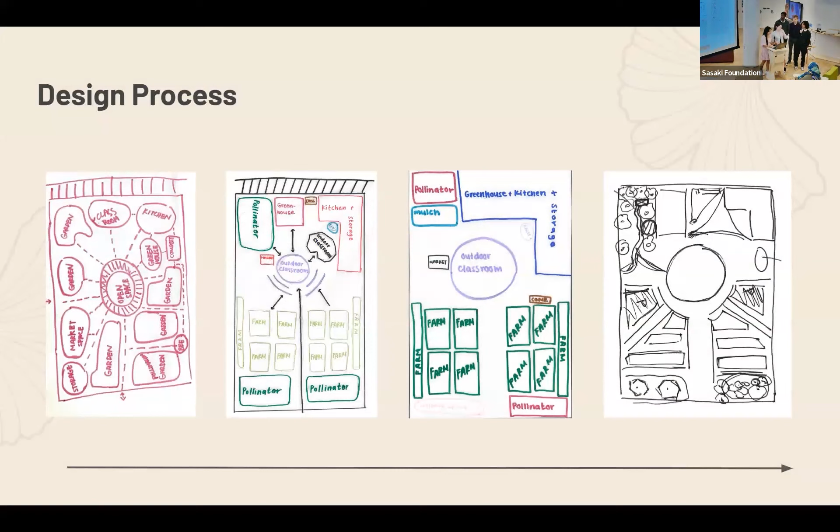So before we even started any of this, we thought of what do we want in this project? And we came up with all these words, but ultimately it led us to this idea of teamwork and community, which we implemented throughout our design. So this just shows the progression of our site layout and what it would look like. Here's our actual 3D SketchUp model where I implemented all of our designs within one model, as well as a floor plan.

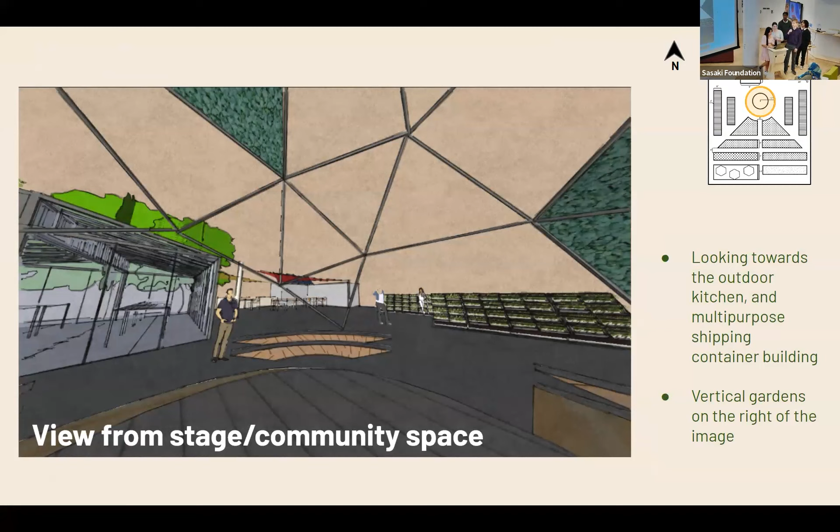Here's one of our renders. This is a view from the stage and community space, looking out towards the outdoor kitchen. You can see some of these vertical garden beds on the right. More about those in a minute.

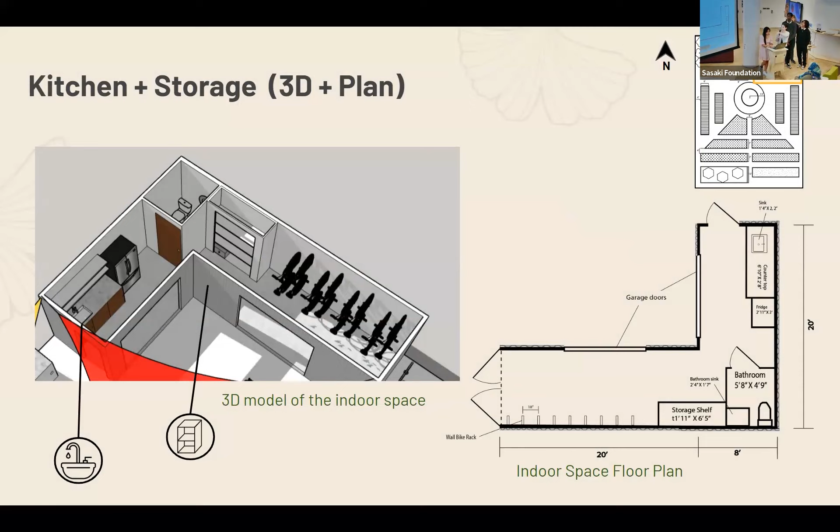So this is the kitchen and storage. Basically, the way we're going to make this is we're going to take two storage containers and put them together. One will be coming from the current site, and then one we'll just get. And you can see the icons again. So there's one for storage and a washing station. And then here we have the floor plan of the inside.

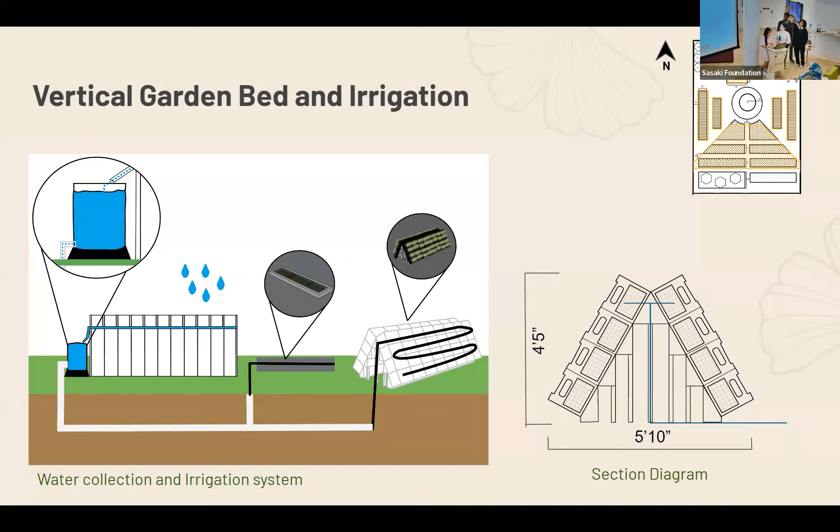As he mentioned, the rainwater collected from the greenhouse is going to be filtered and stored in a rain barrel, which then will be pumped throughout our site into the different garden beds and vertical gardens. More on the garden beds, we're going to reuse the granite curbs from the current site and then add a plastic liner, which will keep the moisture in. Here's one of the spots where we're keeping the asphalt because we don't want the contaminated soil to mix in with the new soil that we're adding.

And then this is the welcome area. On the left, you have the 3D model made in SketchUp, and then on the right, some inspiration. Basically, this will just serve as a welcome area. It'll be the first thing people see because it's right next to the main paths. So it's a nice thing where they can feel welcome and safe to come in.

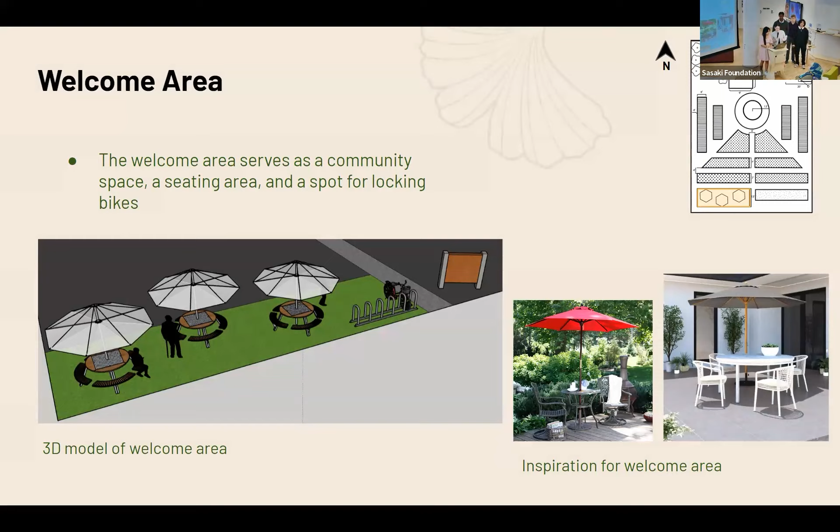So now I'll talk about our community space and market. On the left, we have our mobile market, which can be placed anywhere throughout the site. This is going to be for the farm people to use, to provide culturally relevant foods to other people and any other ingredients or things that the farm may want to do.

And then on the right, we have the underground section of the stage. As we mentioned before, we are keeping the asphalt from the parking lot. Because of this, we are going to have to dig under and place gravel. Because we don't want these two substrates to mix, we are going to place a concrete curb in between. On the surface, there is a dome to provide shade for the people inside of the stage.

And this is located in the center of our site because we wanted to really focus on this aspect of community and teamwork. Throughout this whole process, we wanted to create a space that would benefit the neighborhood. This program taught us a lot about how to make a design that satisfies us, but also the neighborhood and community that we're serving. From 3D modeling to site visits and even life skills, this program has taught us more than the elements of design, but real life lessons.

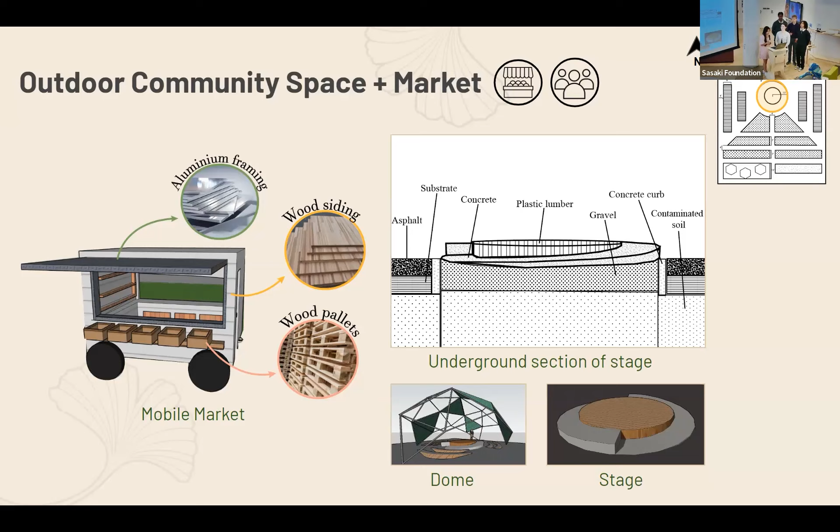So we would like to give thanks to all our mentors, TAs, and audience for supporting us throughout this journey. And we hope that this design will help the new development for the Groundwork Somerville new site. Thank you.

Hi. I was their TA, Jillian, and now I'm going to give out your awards. Good job, guys. I'm so proud of you. Evie. Amos. Malena. Victor. And Yasu. Congrats, guys. Last but not least. Hello.

Hi, everyone. I just wanted to say thank you also really quick. For those of you who haven't met me, my name's Leah. I'm actually the current manager of South Street Farm, so the site that all of these wonderful young people were redesigning for us. And I just also wanted to say I met a lot of these wonderful students about 5 or 6 weeks ago when they first came to visit the site. And I had no idea that there were going to be so many fantastic designs today. And I'm so honored that we have been the recipient of this work and this project.

I know for a lot of us at Groundwork Somerville, the idea of moving the farm is actually really hard. There's been a lot of effort and work put into it over the years. But seeing all of these fantastic designs gives me so much hope for what our organization can look like in the future. So thank you guys so much for all of your hard work.